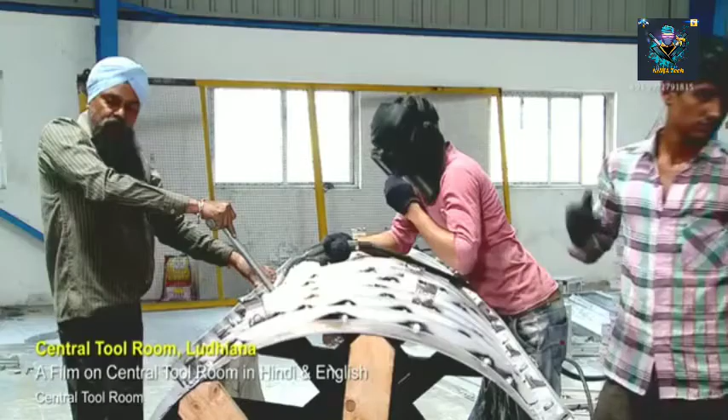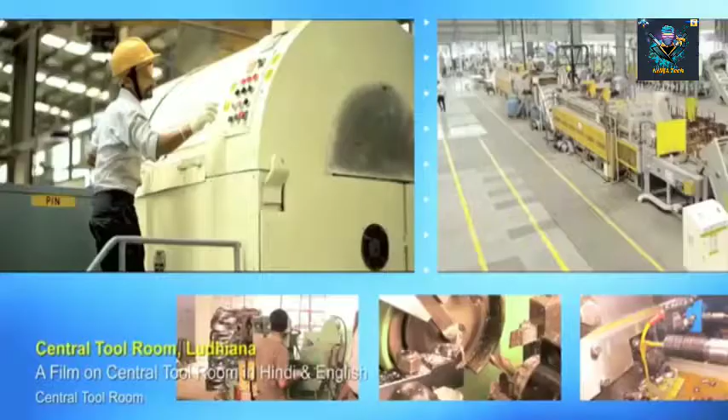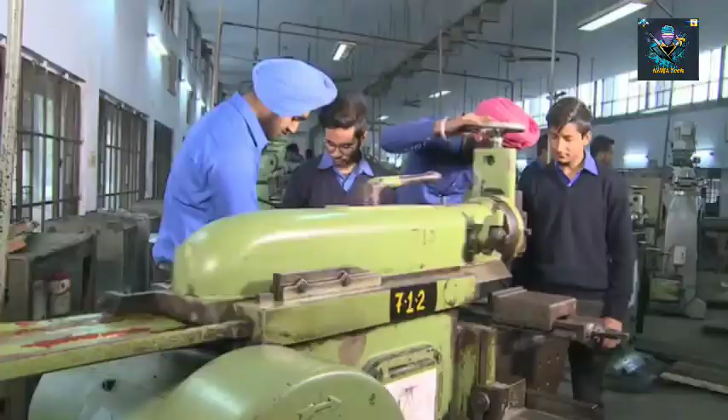India is resurgent. Today, various government initiatives have turned the country into an attractive global investment and manufacturing hub. This has led to expansion of India's industrial base, improved skills, and increased opportunities for its growing youth population. Large numbers of youth are taking industry-relevant skill training that will help them secure a better livelihood.

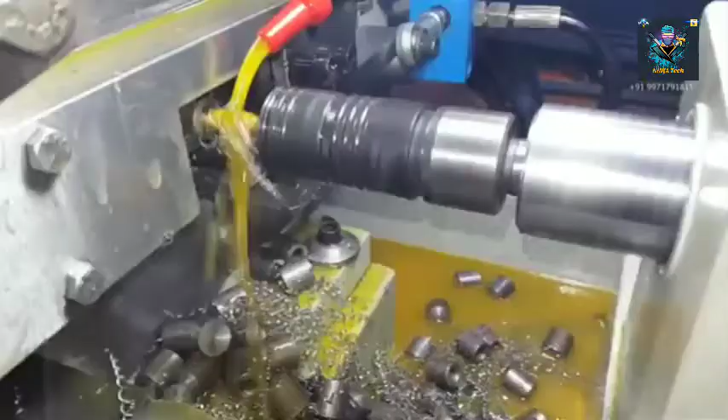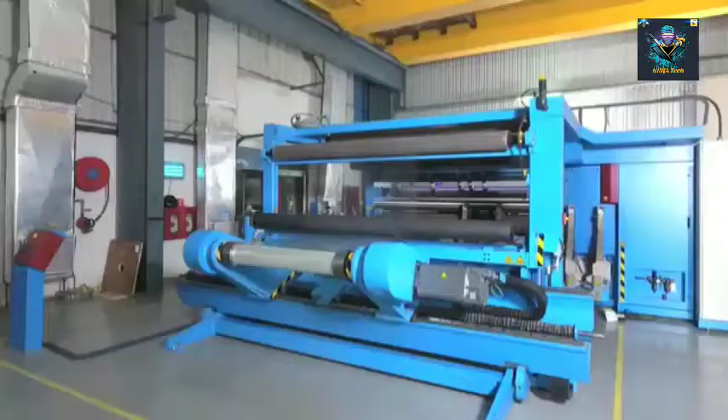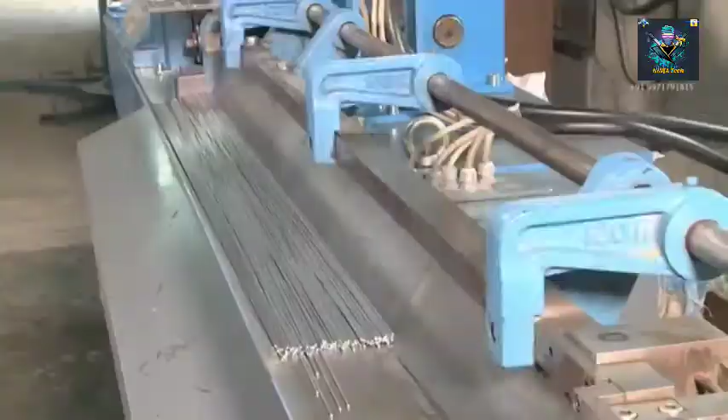Growth and development of the engineering industries depend on the availability of precision tools. These high-quality tools and dies are manufactured with extreme precision on computer-controlled machines. Provision of proper tooling, skilled technicians, and modern technology support call for high investments. Small-scale enterprises who want to develop their business have to rely on institutions offering such services.

CTR wishes to be a service provider to the industry, particularly small-scale industry of the region, to take the benefit of low-cost automation and the technological advancements taking place throughout the world in the field of tool development.

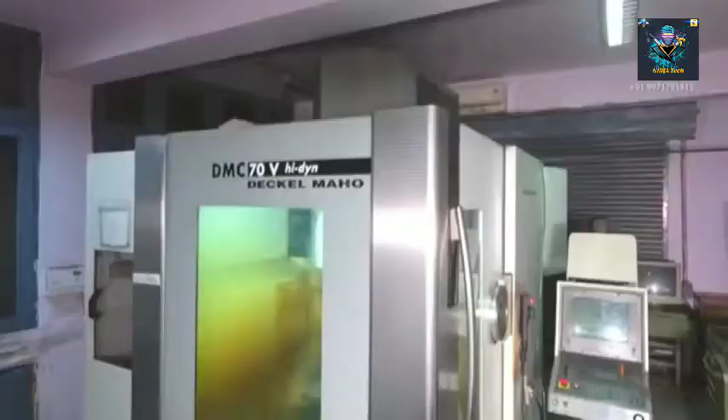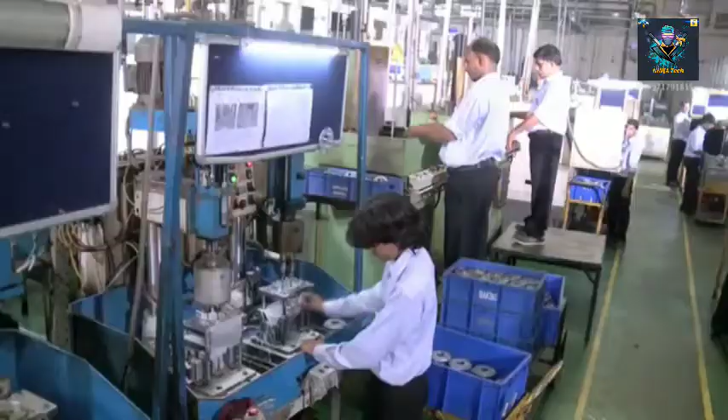Central Tool Room Ludhiana was established in the year 1980 under the bilateral agreement between Ministry of Micro, Small and Medium Enterprises, Government of India and Government of Germany. CTR is a knowledge center equipped with state-of-art machinery, advanced manufacturing and design software to increase the efficiency of micro, small and medium enterprises in the northern region in light engineering and allied fields.

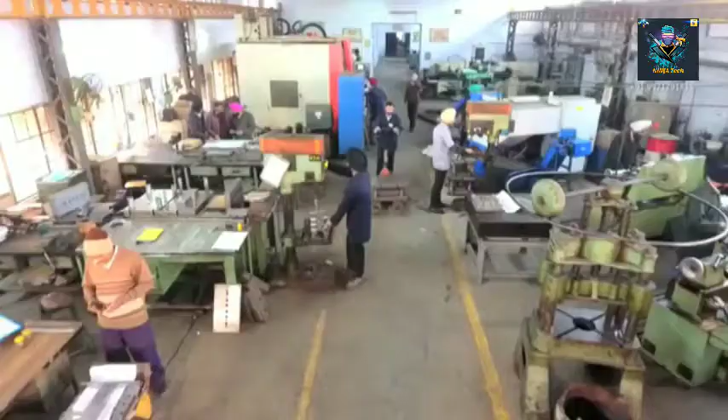CTR Ludhiana provides support in the area of design and production of tools, jigs and fixtures, besides advisory and consultancy services. It also helps manufacture small and medium-sized tools such as press tools, jigs and fixtures, molds, dies and special purpose tools. CTR Ludhiana's core service areas are tooling development, 3D printing, heat treatment and training.

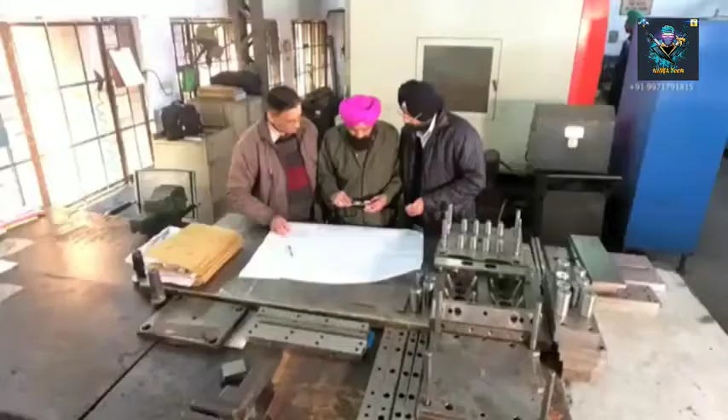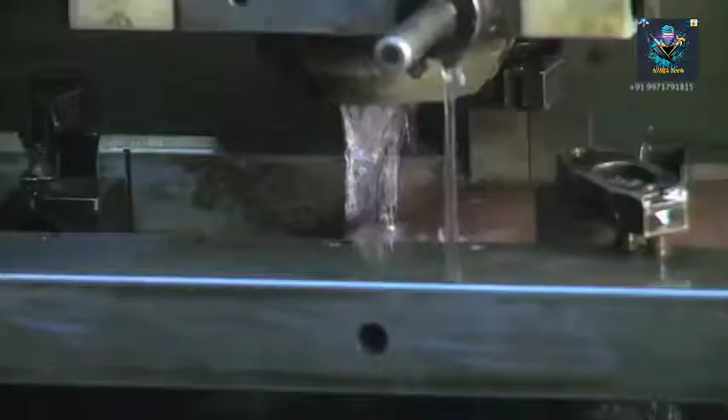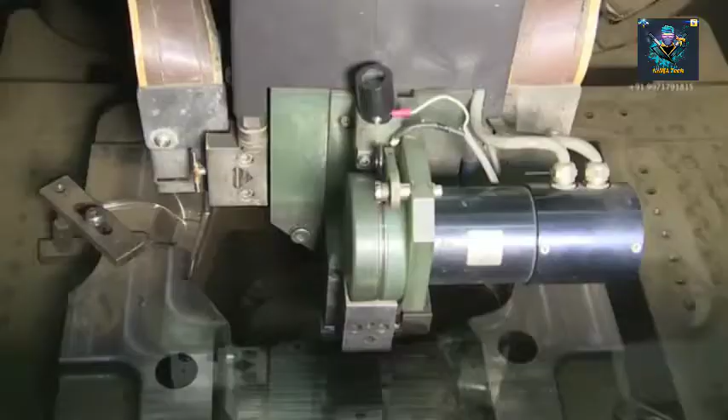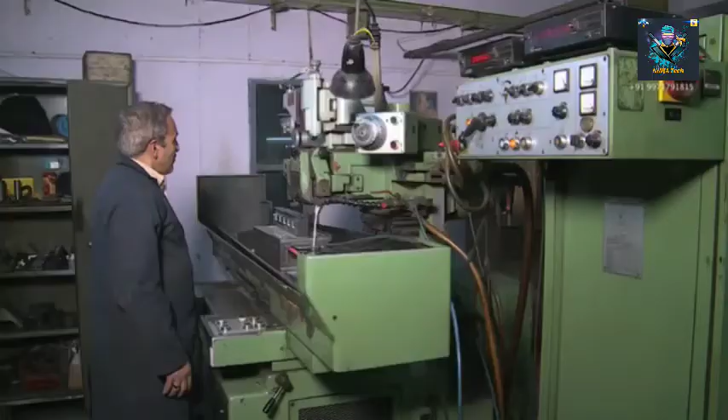CTR has a modern tool room with advanced machines required for development of quality tools under a single roof. Services offered by the Tool Production Department include guidance in planning, design and manufacturing of tools as per latest international techniques, manufacturing of molds, press tools, die casting dies, jigs, fixtures and gauges, computer-aided machining, quality control and in-house tryout facilities, which results in efficient and timely execution of projects.

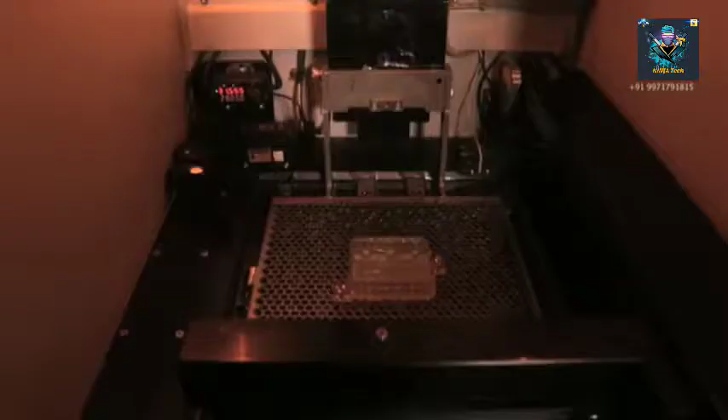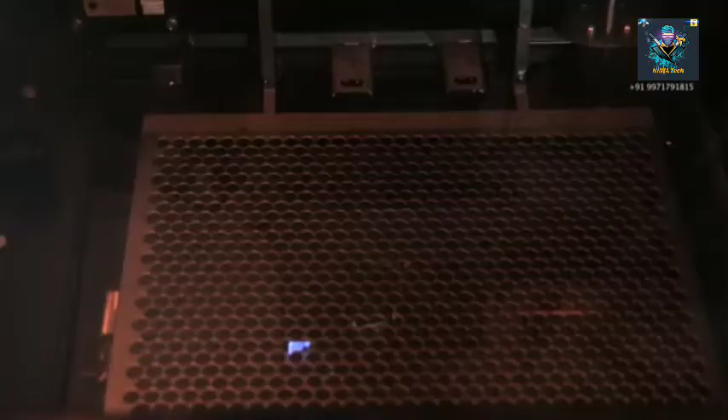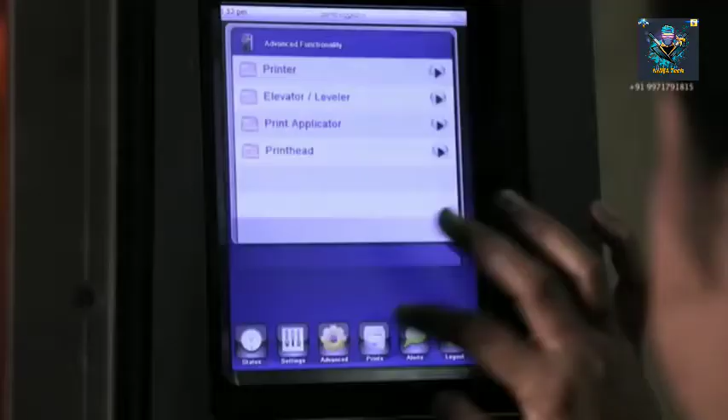Rapid Prototyping Center at CTR Ludhiana uses physical modeling of a design using a special class of machine technology. 3D printing systems quickly produce models and prototype parts from 3D computer-aided design (CAD) model data, CT and MRI data, and data created from 3D digitizing systems. 3D printing is a powerful technology for design validation and production of intricate parts, which are otherwise difficult to make. Customized solutions can be easily addressed with 3D printing.

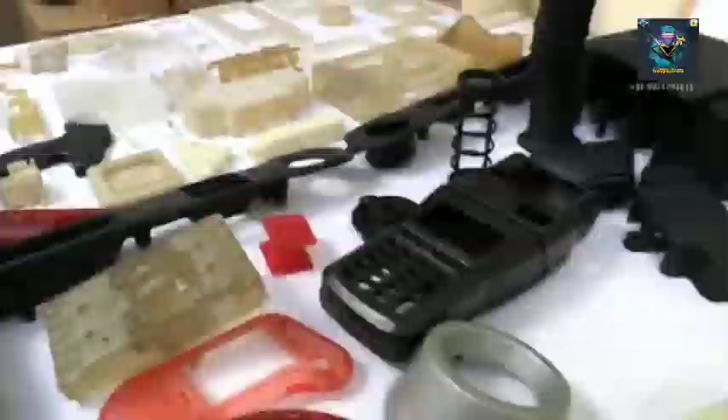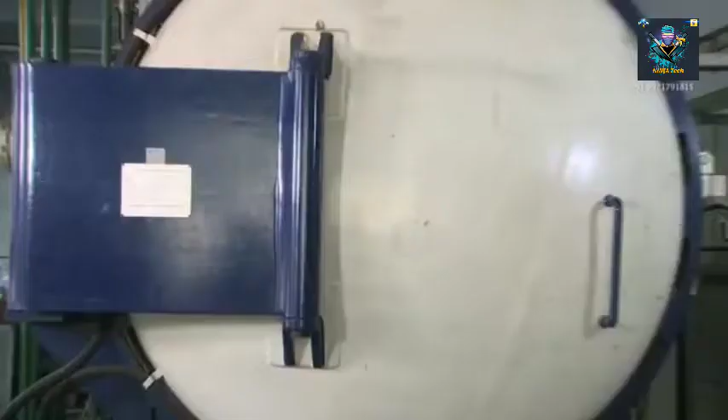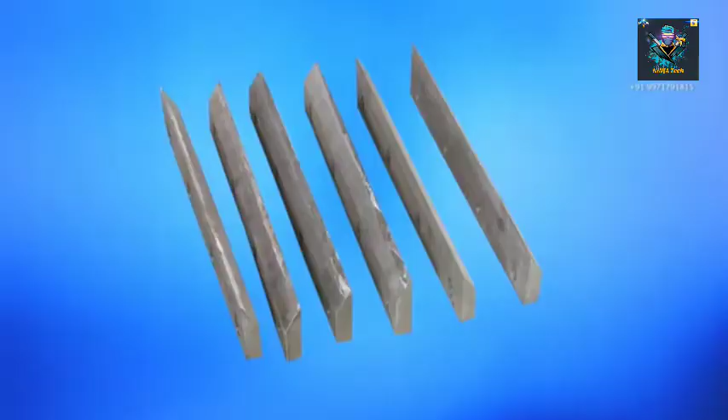To enhance tool life, CTR Ludhiana offers services in heat treatment, vacuum hardening furnace with load capacity of 600 kg, benefit in uniform heating and negligible heat loss, besides oxidation-free surface. Its application is in cutting tools like cutters, broaches, forging dies, textile machinery parts, PDC dies, sheet metal die, and hand tool dies and punches.

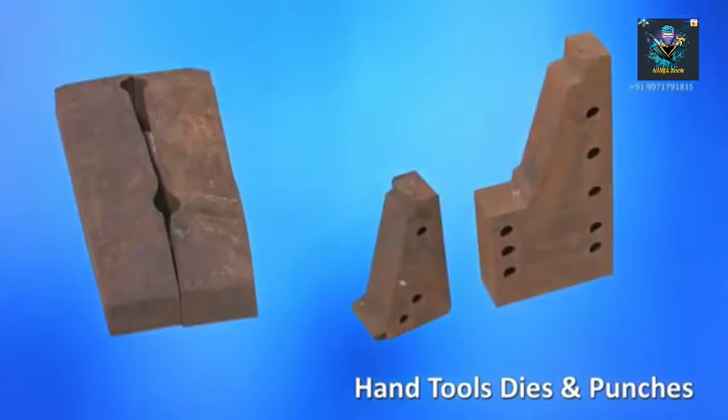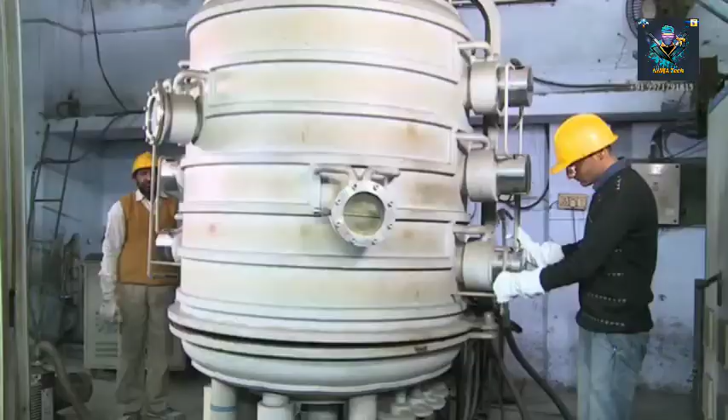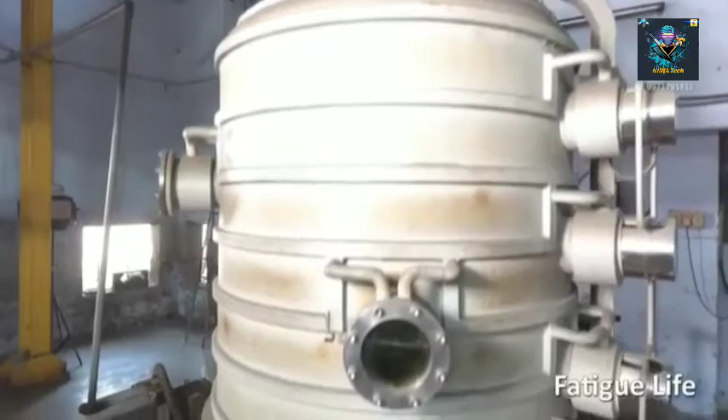Plasma nitriding is used to achieve case hardness up to 1400 HV and depth penetration up to 0.20 mm. Plasma nitriding improves surface hardness, uniform case depth, wear resistance, corrosion resistance, fatigue life and tensile strength. Tempering is done in a pit furnace. Salt bath hardening for all types of tool steels, alloy steel and general purpose steel is also done.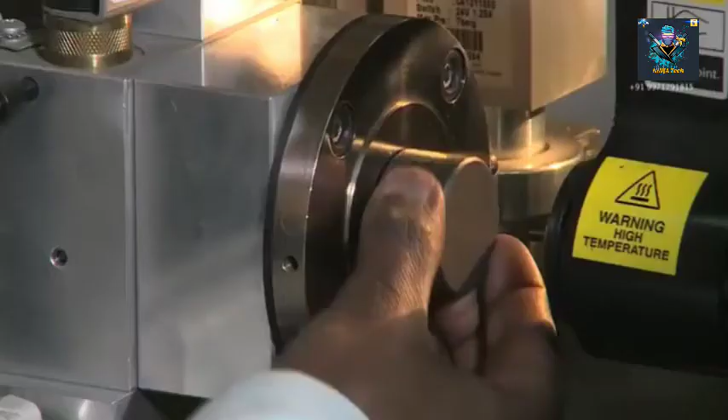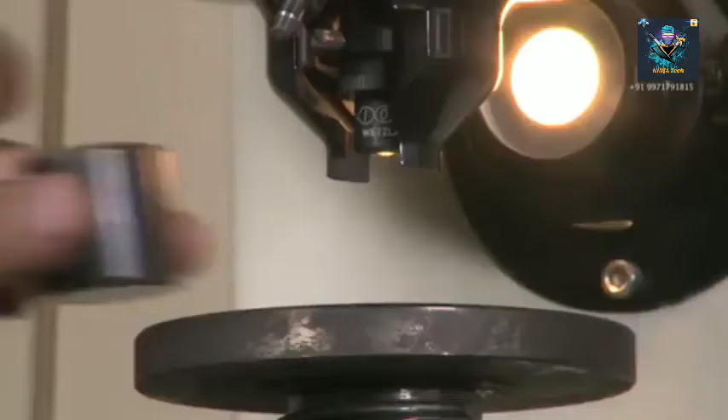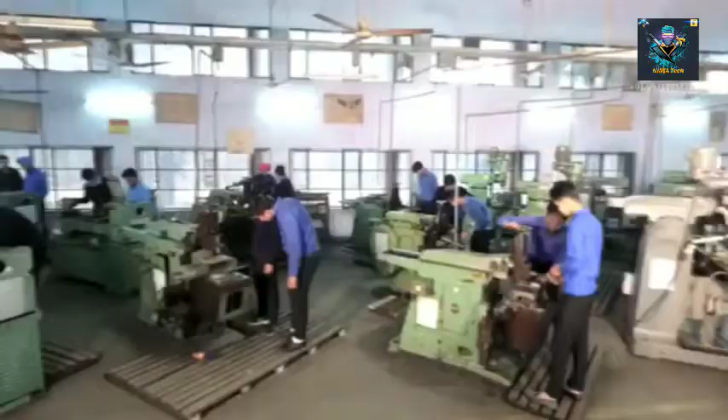CTR has a NABL accredited lab, which has a spectrometer for chemical composition testing, portable hardness tester, metallurgical microscope, ultrasonic flaw detector and universal hardness tester. CTR Ludhiana has emerged as one of the leading technical skill development centers in the country in providing technical skill development courses.

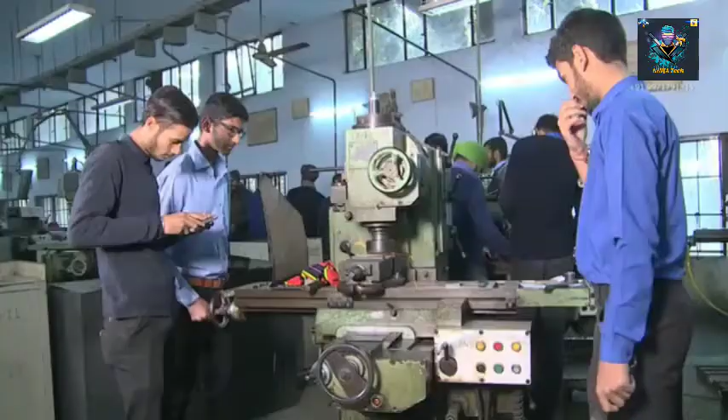Central Tool Room Ludhiana offers training courses of long-term and short-term durations to cover a wide spectrum of technical manpower. It imparts long-term technical training in the form of postgraduate diploma and certificate courses for students who want to become tool makers, technicians in the plastic and metal processing industry, automation specialists or heat treatment specialists.

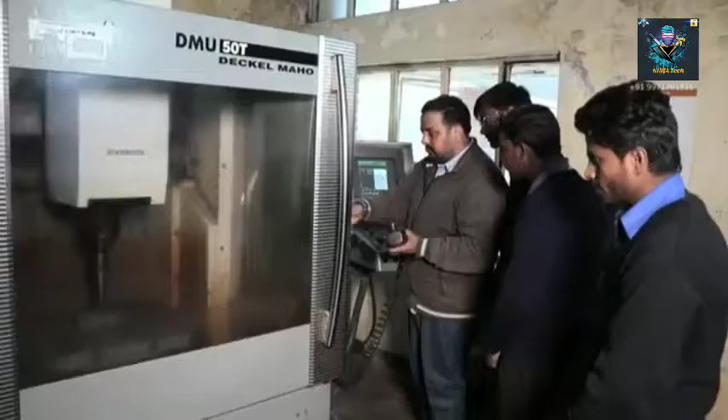CTR conducts short-term and part-time courses, putting emphasis not only on advanced technologies such as CNC programming, machining and CAD/CAM but also offering training in conventional subjects.

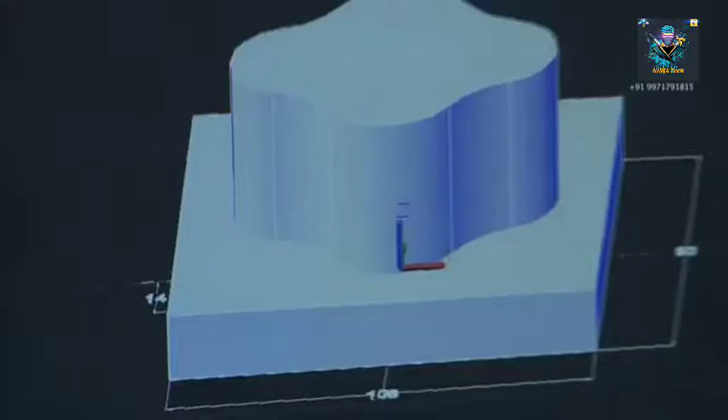To meet the requirement of growth and advancement of industries, CTR has expanded towards the automation and robotics sector and started several long-term and short-term skill development courses in mechatronics, PLC, SCADA, HMI, pneumatics and hydraulics.

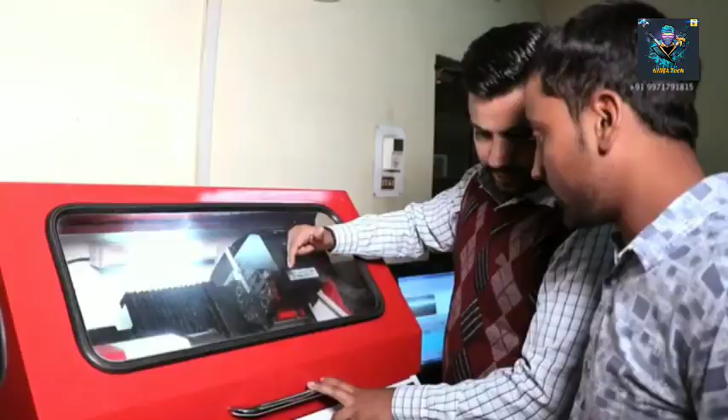The courses offered by CTR are accepted by industries in India and abroad for employment purposes. The institute has robust infrastructure, latest training methodologies and well-trained faculty to ensure the best quality of training. The courses are NSQF compliant. The passed out students carry with them certification of acquired skill.

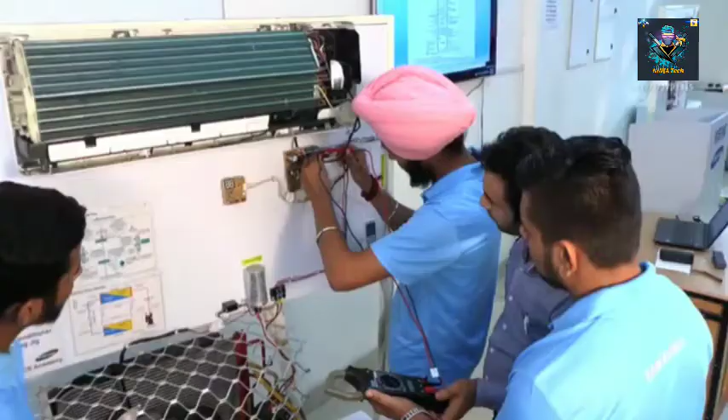Ministry of Micro, Small and Medium Enterprises (MSME), in joint collaboration with Samsung India, is also conducting advanced courses to provide specialized training to students in mobile repairing and maintenance, LED repairing, AC repairing, washing machine repairing and refrigerator repairing.

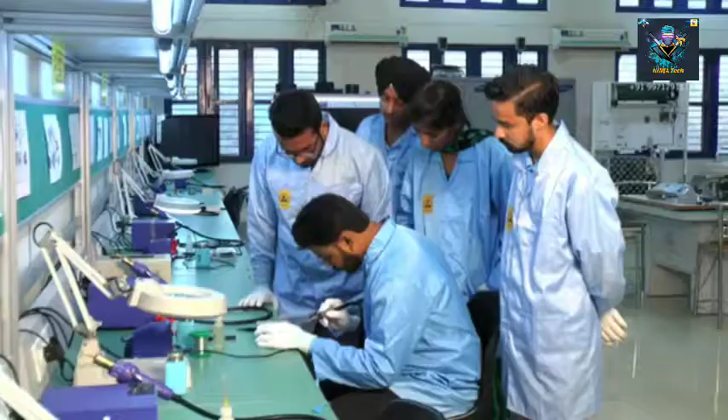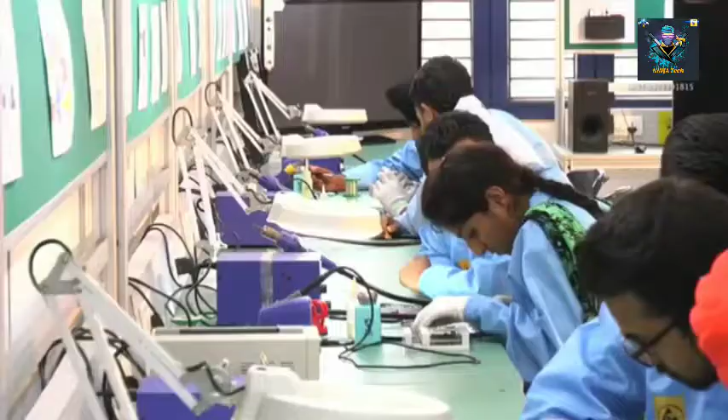Samsung India, through their CSR initiative, is able to benefit the communities by providing all the tools, modern test equipment and other consumable material required for training and skill development of the students. The students are provided with the opportunity to learn on the latest mobile phones, audiovisual and home appliance products. The training covers areas such as repair, troubleshooting and installation.

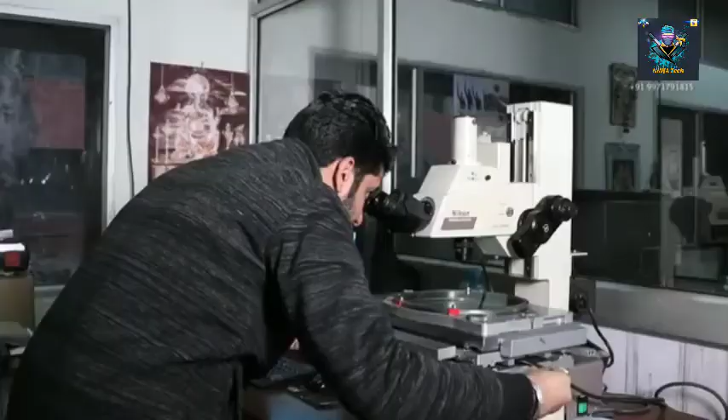CTR Ludhiana strives to achieve quality in every aspect of services and is ISO 9001-2008 certified. The documentation and dissemination are important activities of CTR, which include procurement of books, journals and documents. CTR Ludhiana has a well-stocked library.

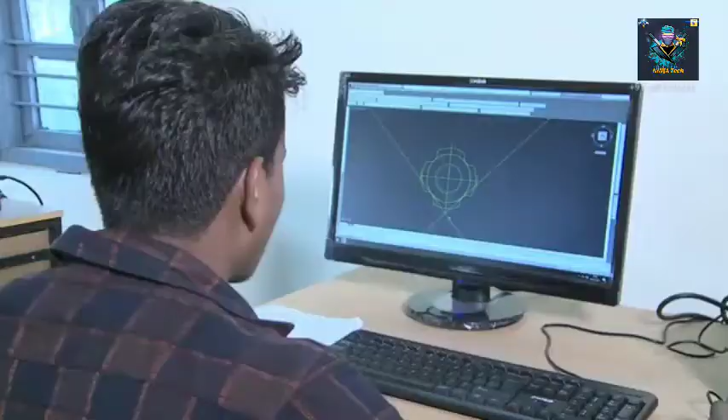CTR Ludhiana has 3 extension centers located at Nilokheri, Karnal and Faridabad with an objective of providing training and services in tool design and development, CAD/CAM and CNC programming and machining to the local youth of the area. CTR Ludhiana has residential hostel facilities for the students. The students are provided nutritious food and recreational facilities.

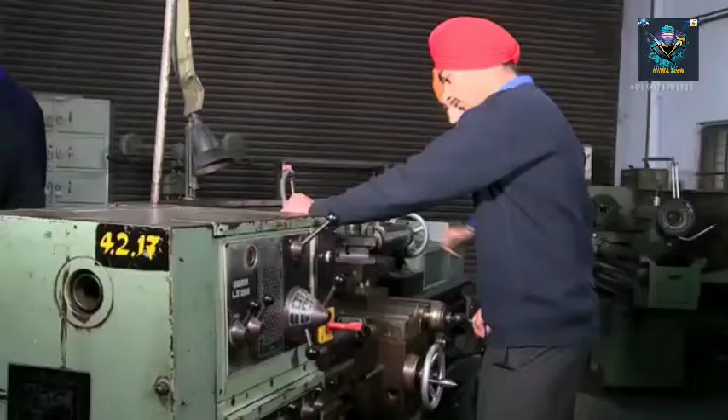By providing people with the skills to earn a living, creating jobs where they are needed, and securing a global network of qualified human resources, CTR Ludhiana has embarked on a journey of excellence to emerge as a trendsetter in the country. Our goal is to be a center of excellence in the field of product design, product validation through 3D printing, tool design and development, and automation for the benefit of small-scale industry of the region.

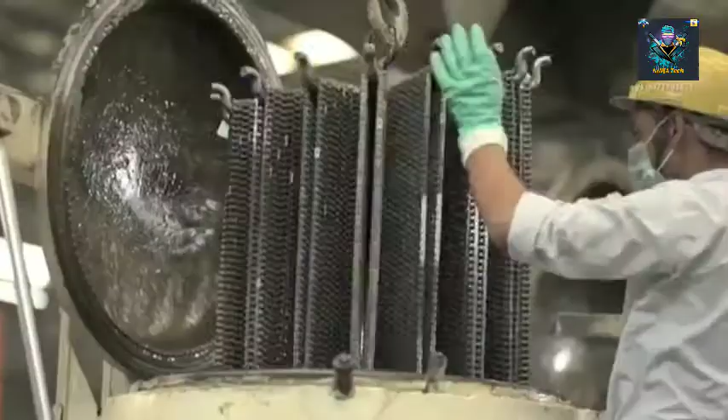CTR Ludhiana is providing relentless service to the nation in skilling Indian youth and contributing towards Skill India.